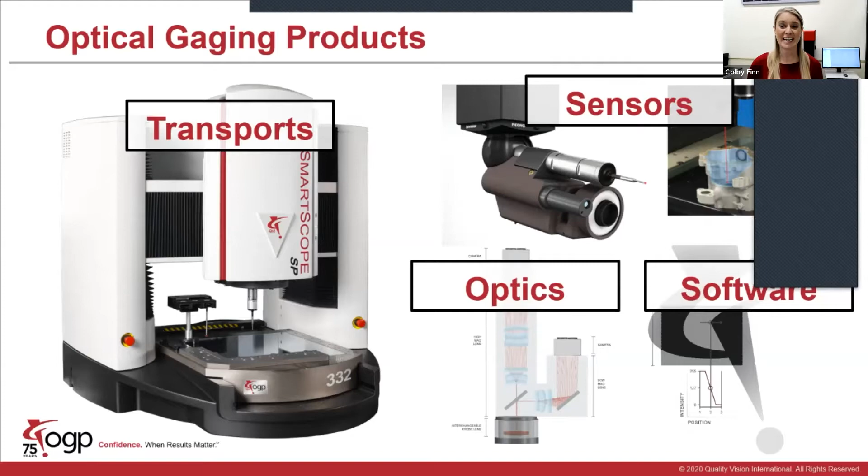So we are an international company, but we are headquartered in Rochester, New York. And what's great about that is Rochester is the #1 region worldwide for optics and photonics research. So there's a lot of top universities and other companies investing in optical technology development. So in addition to our New York office, we have other offices in the United States, as well as Europe and Asia.

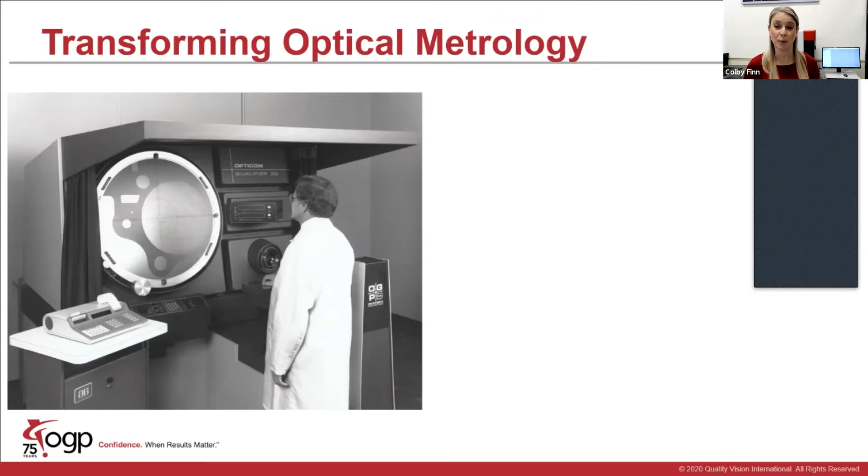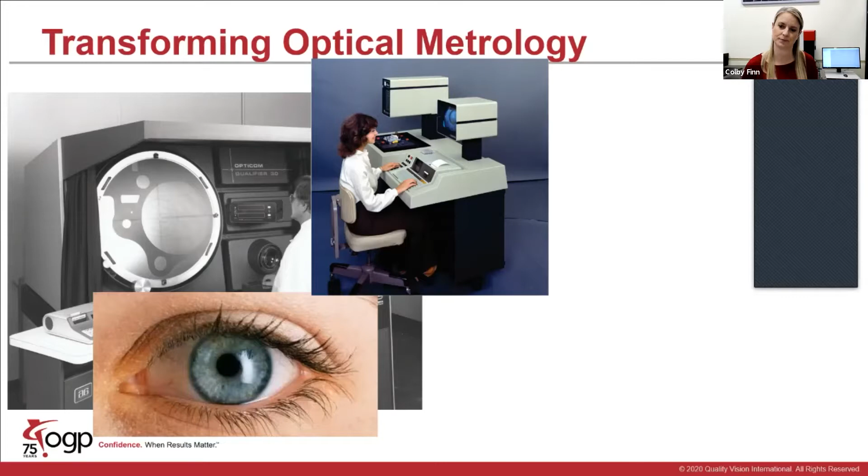So like I mentioned, we have been in the business of optical metrology for a little over 75 years. And we've been part of a major transformation in this industry. When we first started, all measurements were taken with the human eye, like you can see on the screen with an optical comparator. But ever since we introduced the first grayscale sub-pixel image processing for a video system in 1980, software became a key component of video measurement. And now today, it's hard to find any modern piece of measurement equipment that doesn't require software to take a measurement.

So why did this transformation occur? The obvious answer is software is more efficient than humans. You gotta pay people, they get tired, they complain, they make mistakes. But people are actually really good at some things related to optical measurement, such as automatically recognizing parts, detecting dirt, whether it's from your part or not from your part. And it's taken many, many years to get image processing software to the level where it can mimic human ability in video measurement, but also not require a lot of training. So today we're going to talk about how software technology continues to push optical metrology forward, both related to capability and ease of use.

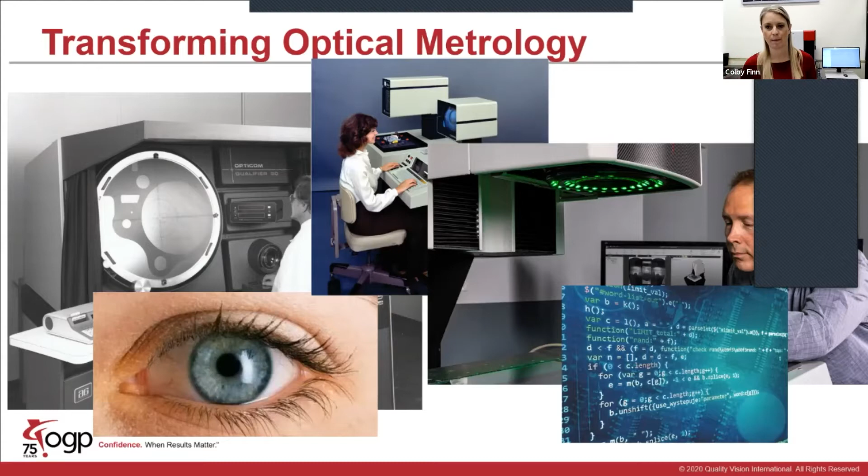So we organized our software tips based on the reasons people choose non-contact measurement technologies, say over traditional technologies like tactile CMM. And there's 3 reasons. The first is they're faster. You can get many measurement points and many dimensions in one shot with optical technologies. Second, they're better, meaning for some applications, you get more accuracy and higher resolution. This is specifically true for small parts with small features or delicate parts that you don't really want to touch.

And lastly, they're easy to use. So when you're programming a measurement system, teaching it what you want to measure, when it's an optical system, you see a live image of your part. So it makes it very easy to interact and get immediate feedback on what you're measuring.

So today we're going to talk about software tips for video measurement and 3D scanning separately. So both technologies have the same goal to measure dimensions on your part, but there's different strategies and best practices for each. Video measurement, you're usually measuring feature by feature or getting coordinates, where with 3D scanning, you're measuring and grabbing data on your entire part at once.

So Jim is going to show you software tips for video measurement using OGP's Zone 3 metrology software package. Zone 3 is the software that acquires and analyzes data from OGP's 3D multi-sensor systems. And I'm going to show you 3D scanning tips using Cotem's Evolve suite. So Cotem is a sister company of OGP. We're both divisions of QVI.

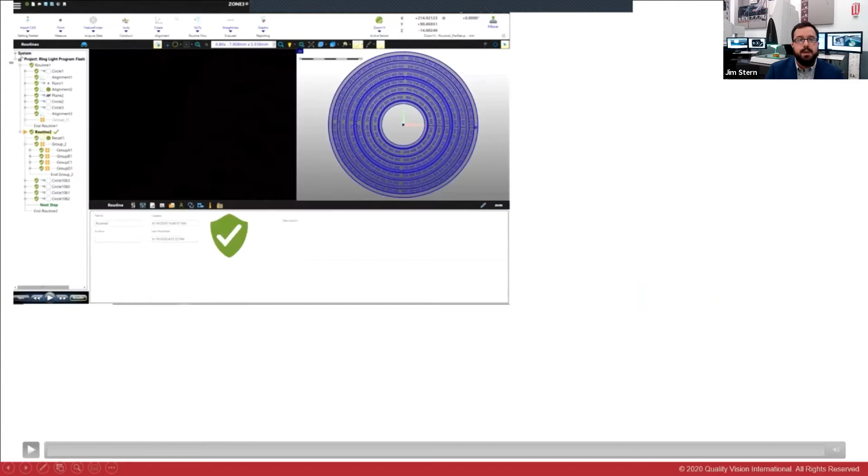So what you're going to see here in the video is a traditional zoom system with a smaller field of view. So we're going to be measuring a multitude of diameters on this part. So this traditional field of view system has a smaller field of view to start, but also has an optical zoom system to be able to increase accuracy and your optical magnification on the features that you want to measure.

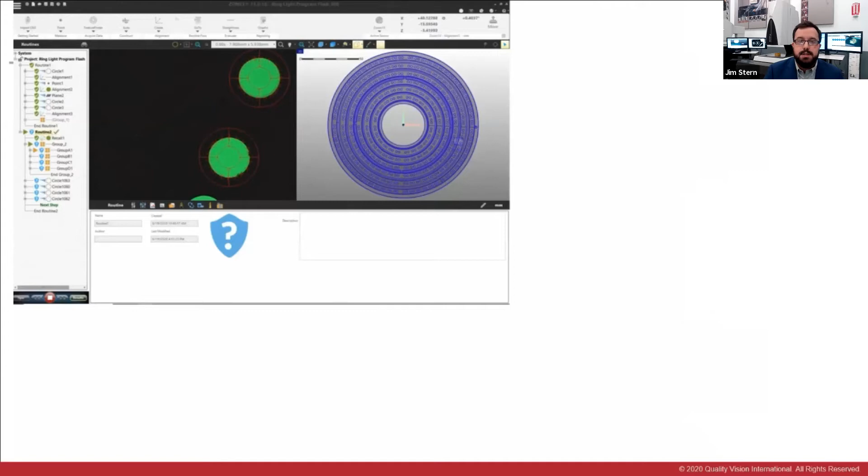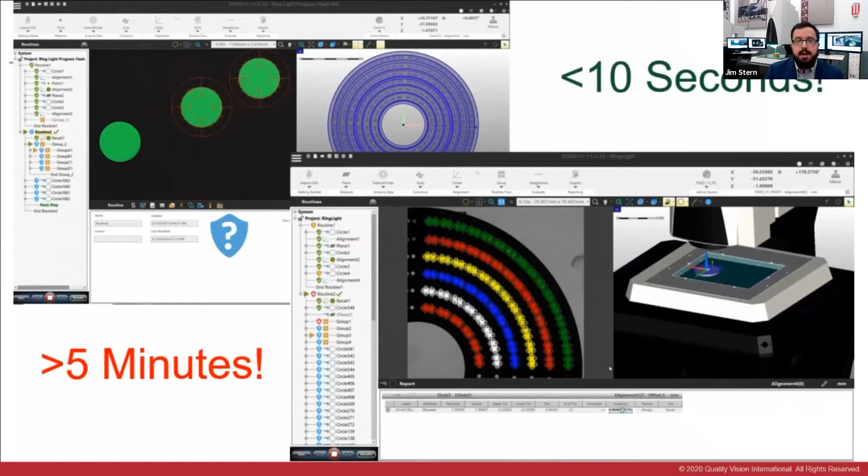So maybe this is not the system or the field of view that you might want to use when you're doing repetitive dimensional checks like these diameters going around this part, because it takes over 5 minutes. Now, let's do this same part on the Fusion system here, where you're going to see a large field of view and be able to see all the measurements at once. Now, while using software, we're able to measure all these diameters in a single field of view all at once, now reducing our inspection time to 10 seconds.

Another benefit of large field of view is that it allows you to recognize and align parts automatically. This is possible in Zone 3 at any field of view and on other systems like the traditional one we showed.

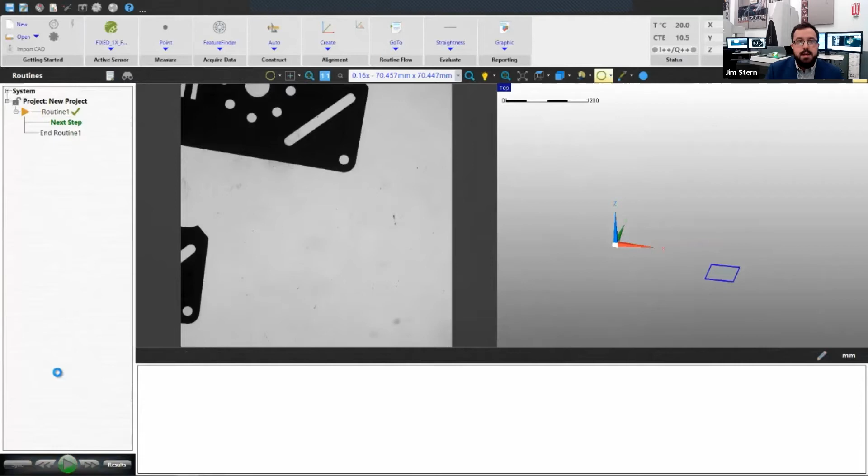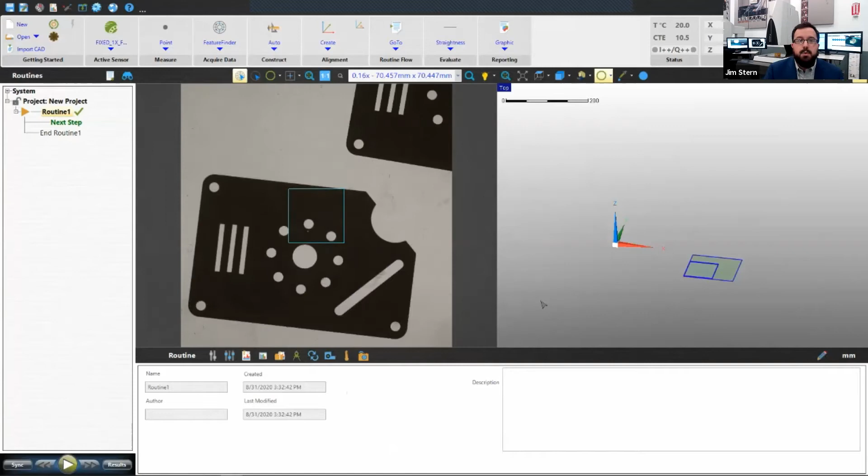But it is more efficient when you have a large field of view to see the entire part that fits inside that. So right here, we have parts set down on the stage, no specific orientation or fixturing, and then we're going to search in a specific area to be able to automatically recognize the part and then inspect all the dimensions that we need to in seconds, showing you a visual representation of what part passed and what part failed, so an operator can easily grab off the stage which ones they might need to reject or which ones they're going to keep.

All right. Now, with having large field of view systems, one thing you got to be aware of is some of the caveats that can go with that. If you're going to take advantage of these entire field of view systems that they have to offer, you need a very high quality lens design combined with advanced software compensations to get the accurate measurements that you're looking for.

We're not going to go deep into the optical lens design theory, but there are two things that are extremely important for video measurement, especially with large field of view systems. Getting the same results anywhere in the field of view, which equates to your distortion across that field of view, and getting the same results even when you aren't at the perfect focus of the system, which represents your telecentricity.

Here is a visual example of a system with poor optical performance for video measurement. As you can see, near one side of the field of view, you see the right wall of a straight down bore. Near the other, you see the side of the left wall of the bore. This is evidence of major optical errors.

Now, this is a gross example, but the tricky thing is an image can look perfectly fine to the human eye, but have huge errors across the field of view and the depth of focus, or the range the image looks in focus. We aren't talking microns, but hundreds of microns. Published accuracy specifications don't typically apply across the whole field of view. So you can't just assume your field of view is good by what you see on a technical data sheet.

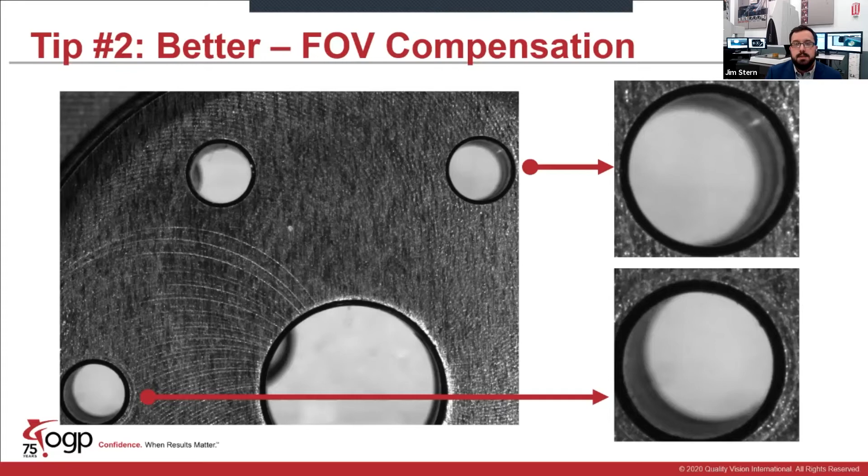At OGP, we've learned you need to have lenses designed specifically for your video measurement and software that understands the characteristics of your exact lens to get an accurate optical performance. Our large field of view systems go through rigorous alignments, compensations, and testing in the factory to ensure they will meet your customer and your specific subpixel accuracy expectations. And what you get is the images that you see on screen now, all right?

Our recommendation is to go with an experienced video measurement system vendor you can trust or get educated on tests you need to perform to confirm your video system is optically accurate. I would also recommend a real-world test of your application on the system you're probably thinking of choosing to measure your parts or your applications in the real-world environment.

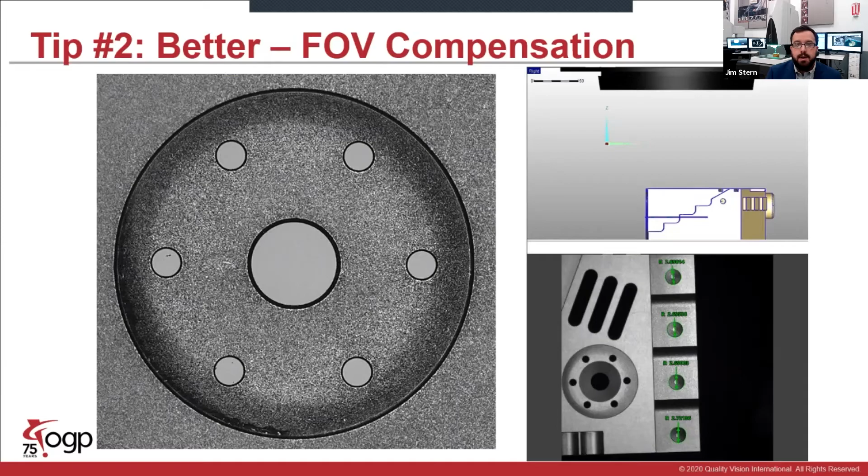Now, with this, you also get to use your full field of view when you're compensating for the distortion correctly with the software or any errors that might be involved. Because you have a large field of view, you want to be able to use the whole optics or what you see on screen. So as you move around the stage, you want the same results inside the accuracy specification for that field of view.

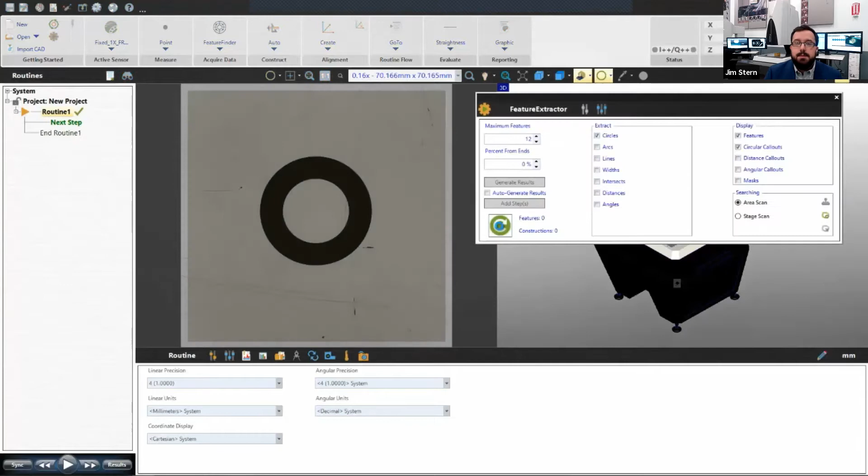So now let's get into maybe some easy video measurements, all right? So one thing you can utilize to make video measurements easier is CAD models, all right? Everybody has CAD models these days, but CAD models really simplify measuring with video. There is a misconception that programming from 3D CAD with video is difficult.

Since your CAD model is 3D, hold on, let me turn the light back on.

Gotta save energy. Since your CAD model is 3D and you're only seeing a 2D video image on screen. But this is definitely not the case, and I will show you a couple examples of this.

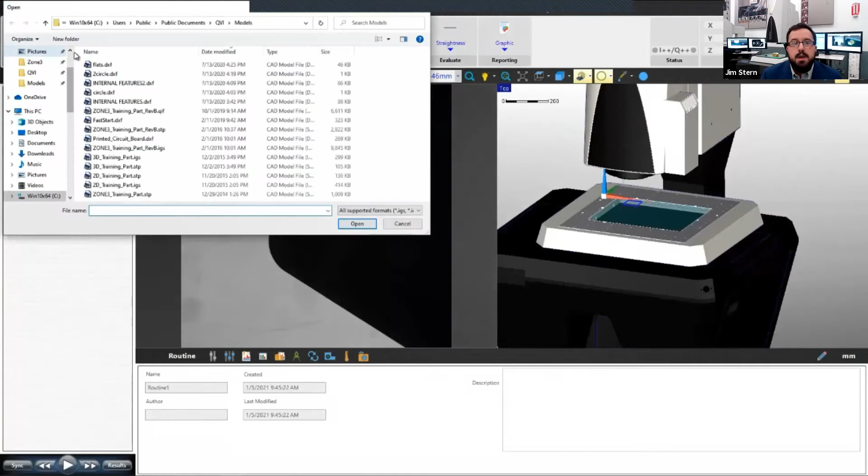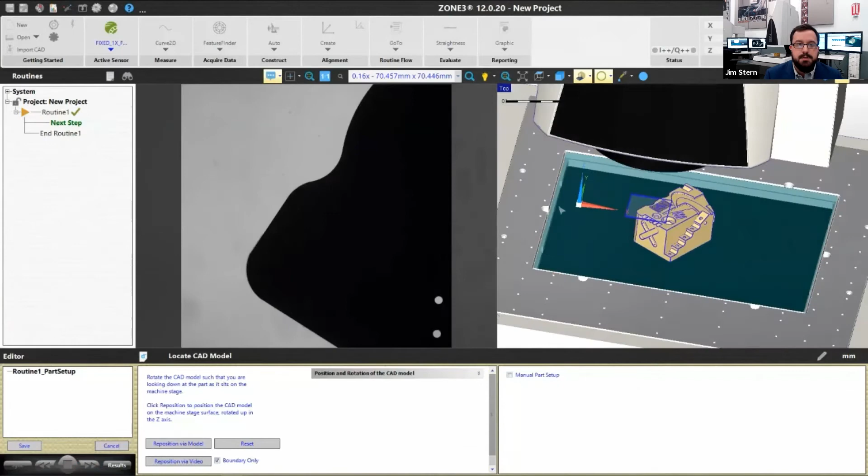All right. So what you're seeing here is a 3D CAD model loaded into our Zone 3 software. It comes in CAD coordinates, but it's not really where it is sitting on the stage. So what we can use is the large field of view to automatically figure out where the part is on the stage using our reposition via video option in Zone 3. Now, once it figures it out, it places it on the stage in the real world where it is, all right?

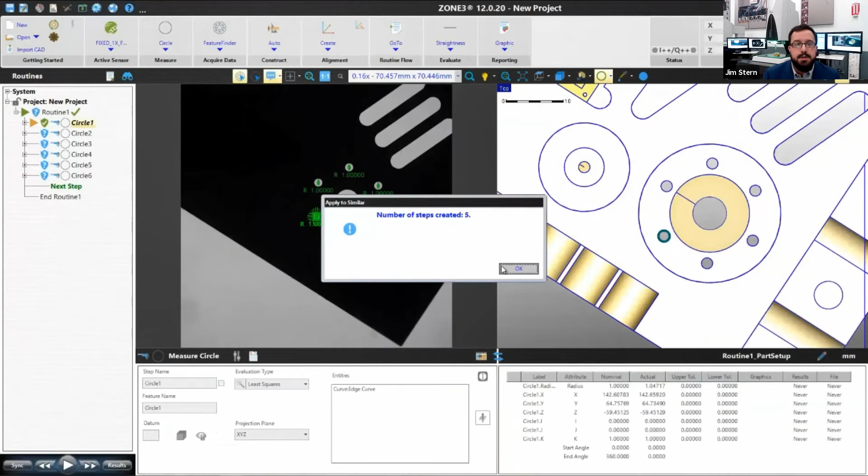So now I can quickly start measuring features on that CAD model using automatic path generation using our edge detection feature finder. Once that's done, I can then use the CAD model to automatically search for similar features and automatically program the extra 5 circles that you see.

We can optimize that to then utilize the field of view to automatically measure that in one single spot on the field of view, trusting that we get the same results because we're compensating for any kind of errors across that whole field of view.

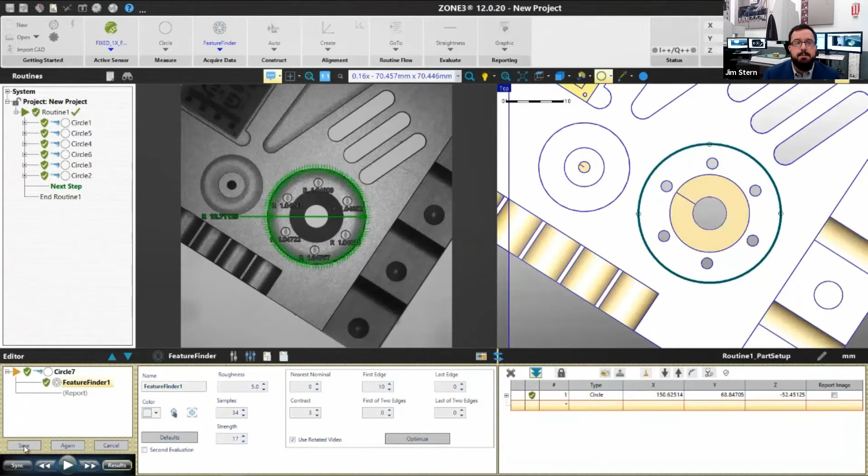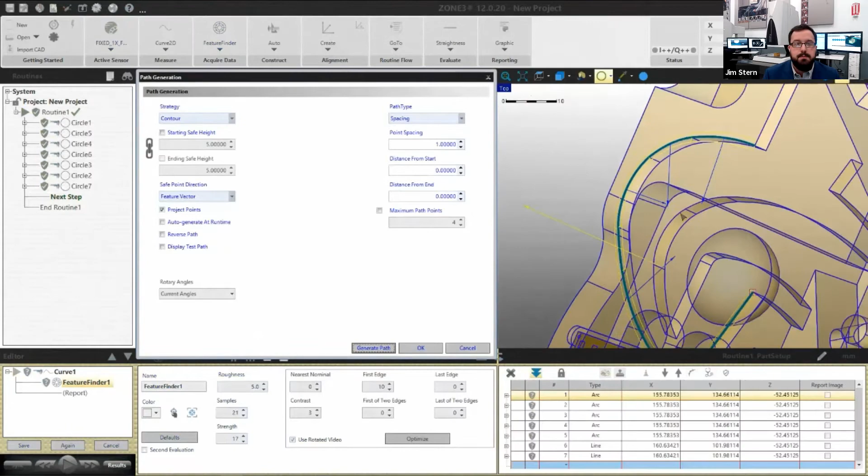Another misconception is being able to measure features that might not be able to be measured using backlight, as well as complex curves or geometries that you'll see here. I'll select multiple curves into one finder, and then use the system to automatically generate a path to measure these features with our feature finder tool all at once. And then we'll go automatically to where it is and measure this automatically with our feature finder tool, breaking up into lines and arcs based on that complex curve.

All right. Those were some tips on how to get faster and better easier measurements with video sensors demonstrated by the OGP Zone 3 software. But now I'm going to send it back over to Colby to give some tips for 3D scanning using Evolve Smart Profile. All right, there you go, Colby.

Thank you. Great. Thanks, Jim. So like Jim said, I'm going to show faster, better, and easier tips for 3D scanning. Before I get started, I'm going to show you the machine I'm going to use for my demos. So let me stop the share for a second.

So this is an OGP ShapeGrabber AI 320. ShapeGrabber systems are automated laser scanners for fast 3D measurement. The system can take more than 1 million points a second. So the laser line scan head moves up and down behind this cover here, and your part automatically rotates on the rotary here for full 360 degree coverage.

So this system here can have up to a 190 by 300 millimeter cylindrical measuring range. And this is our most compact automated unit, but we do have larger systems that can scan parts longer than a meter. This system also has a tilt axis that actually tilts the scan head. It's motorized, it's automatic. And that way you can scan the top of your part without having to pick it up, flip it over, rescan it, and use software to stitch it together.

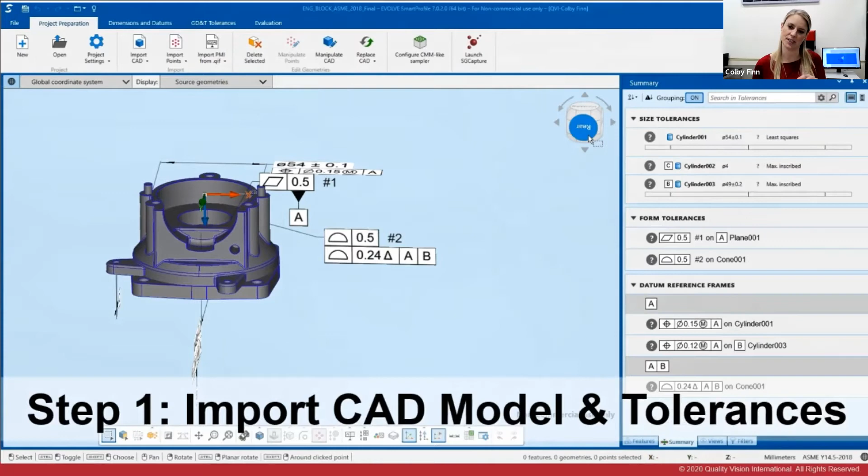So I'm going to show you a new software technology that allows you to overcome these issues and do fast GD&T with 3D scanner data. We're going to use Evolve Smart Profile and a CAD model to do very quick GD&T. Sorry. So the first step here is to import your CAD model and tolerances. And if your design engineer didn't embed the tolerances in the model, you can readily add them in Smart Profile.

Once you have everything in there, you're going to import your measured points. I'm going to use points from my ShapeGrabber system here, but Smart Profile can take points from any device, whether it's a CMM, laser scanner, CT scanner. So you'll see my points in a second. It's the green scan cloud.

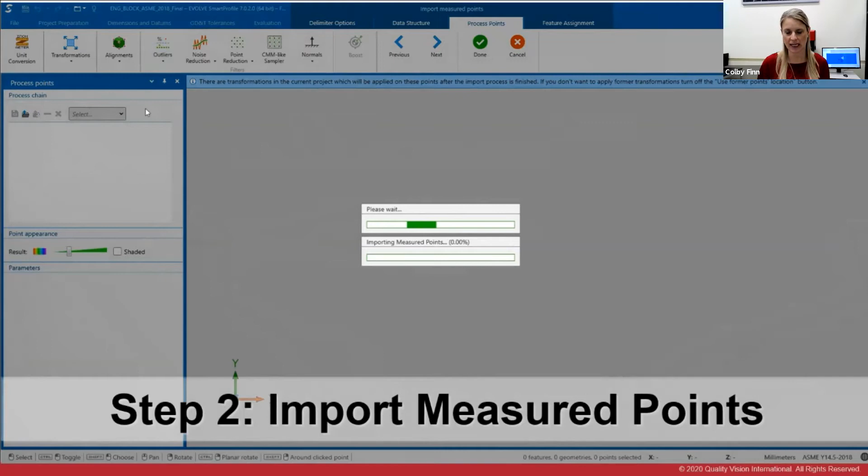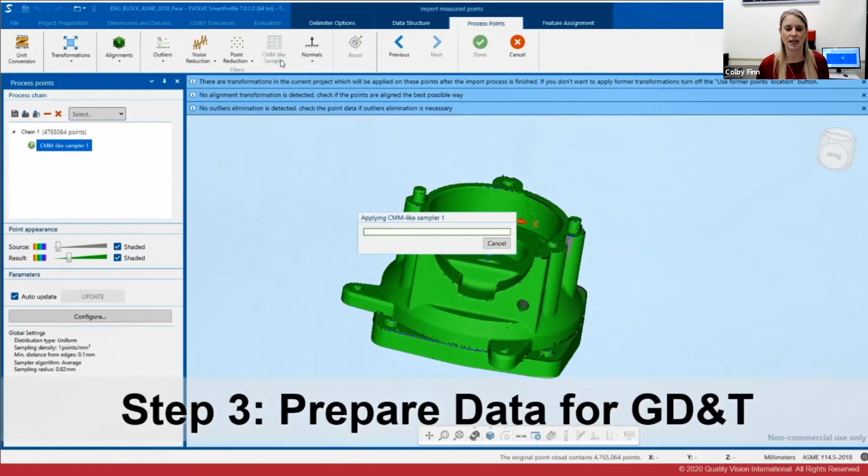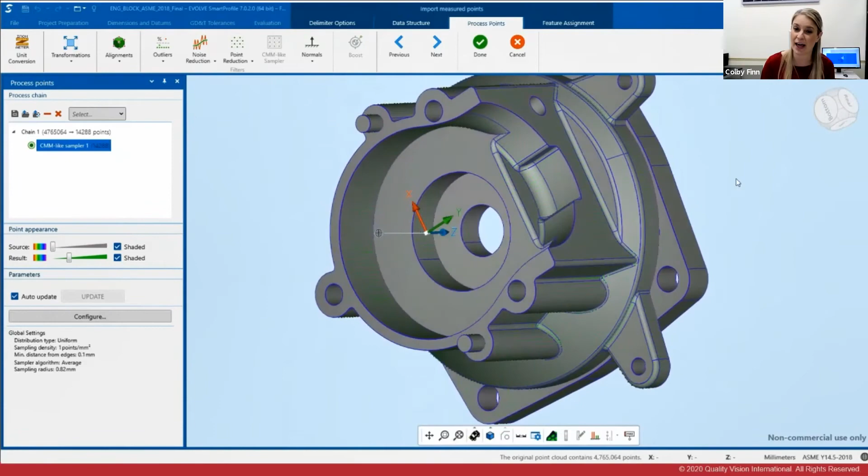So we call it the CMM-like sampler because the resultant point cloud we're going to get is going to look like a high density point cloud taken with a CMM. And similar to CMM data, all the points are going to be valid in X, Y, and Z, and therefore you're ready to do GD&T. I don't know if you can see it through the video, the tiny green points on the model are my points after the CMM-like sampler. So now we're ready for our fourth and final step, and that's to evaluate the GD&T results.

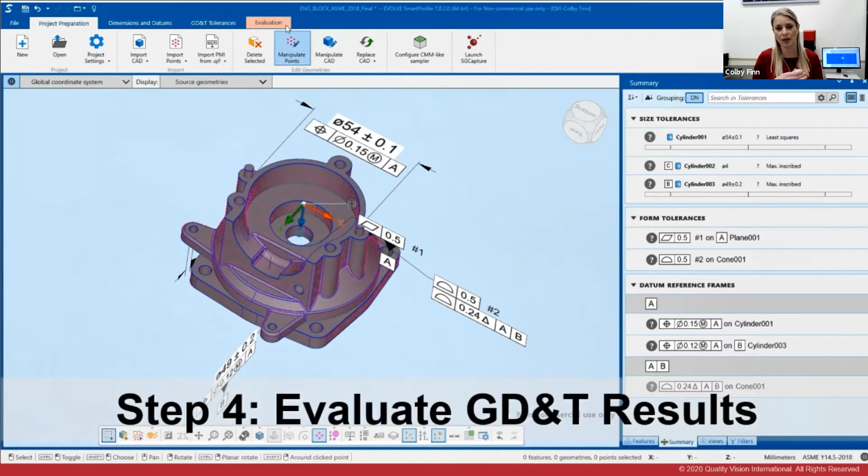So the software is going to fit the point cloud to the CAD model, run a bunch of optimizations to simulate hard gauging and give you GD&T results. So you will see here that everything passes.

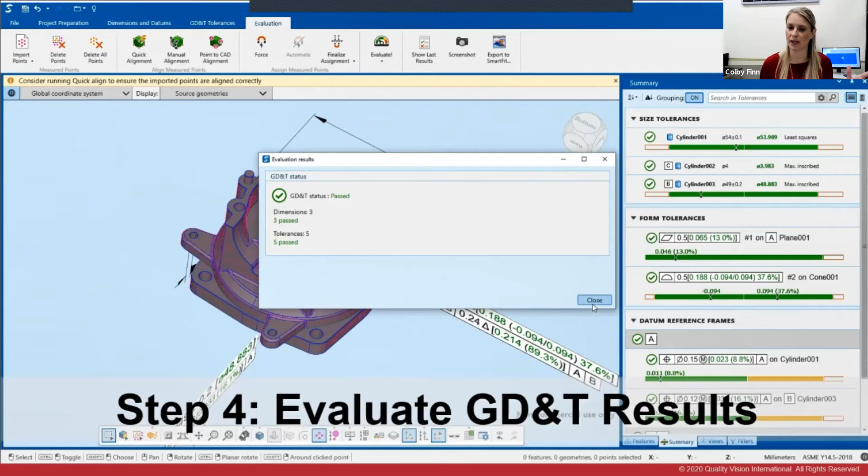And what I was showing you was a step-by-step of how to process 3D GD&T with Smart Profile, but all of the steps from data acquisition to reporting can be fully automated. So you don't need someone here clicking the buttons. You can get a fully automated workflow.

So this demo was how to get fast GD&T with a 3D scanner. And now we're going to move on to how to get better data from a 3D scanner, so more accurate results from 3D scanning. So I'm going to show you a software technique that allows you to get better measurement results without investing more money in hardware. So we're going to show a new software compensation method called Boost.

And what Boost does is lets you take the accuracy of a reference machine and map it onto the data from either a cheaper or a faster technology that's not quite as accurate as the reference device. So I'm going to show you an example of Boost for 3D scanning.

And Boost is part and machine specific, which means you have to create this compensation for every part and machine combination you want to give this accuracy boost to. But luckily, the software does most of the work for you, and I will show you the 5 easy steps to both create the compensation and measure your parts in production.

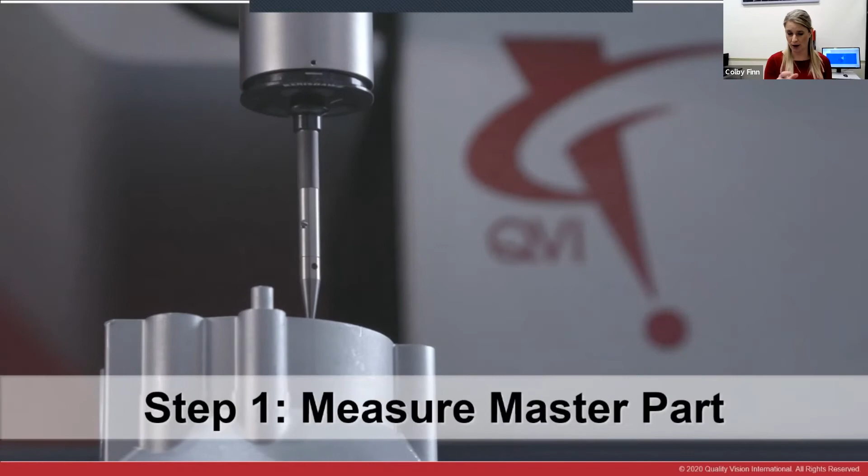So the first thing we're going to do here is select a master part from our production run and measure it on both our high accuracy device, in this case a CMM, and our fast production technology, in this case our 3D scanner.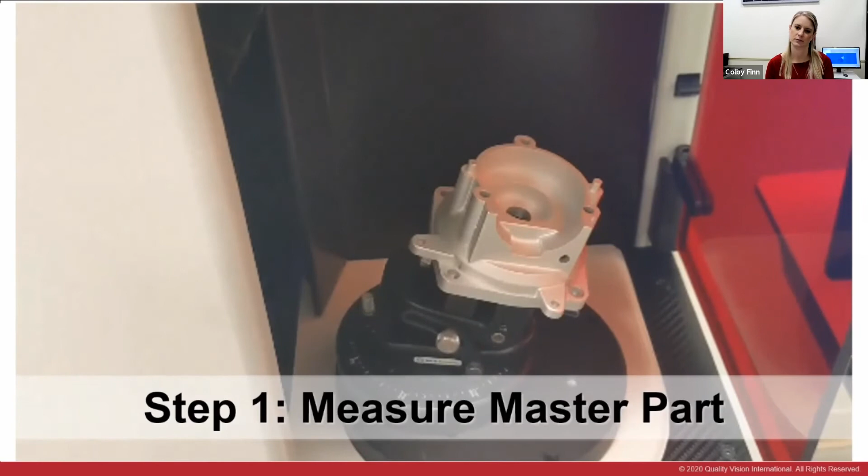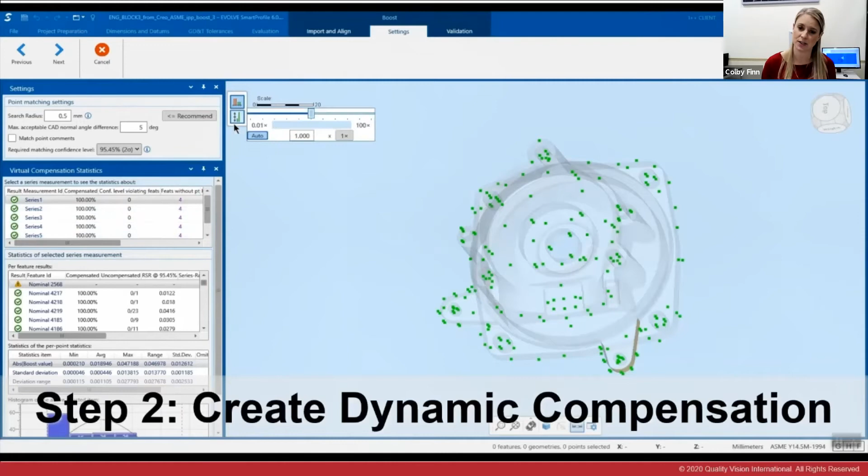Once we have the point clouds from both devices, we're going to load them into Smart Profile, and it's going to automatically create that dynamic compensation. Again, this is going to map the accuracy of the reference device onto the data of your high-speed device. So you'll see on the screen, the little whiskers represent the point-based compensation the software is doing. So once you have this map created, you're done with your reference CMM, and you're ready to measure production parts.

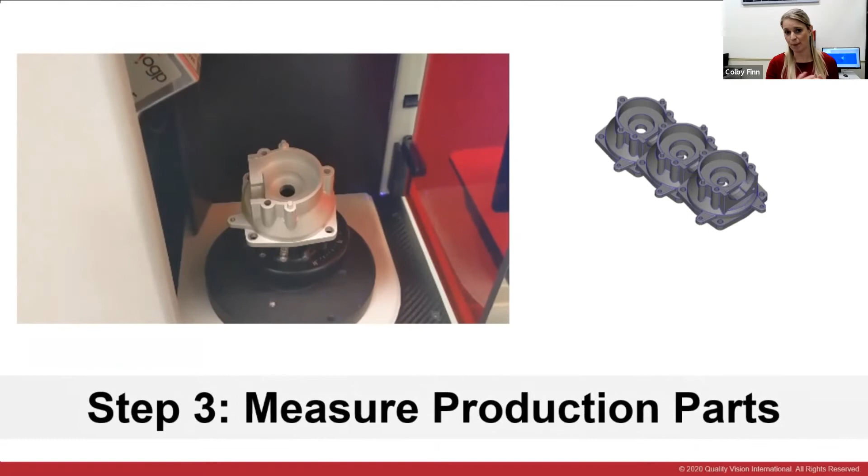So step 3 here, we're actually measuring our parts with our very fast technology. And now step 4 is to apply that boost compensation. So in Smart Profile, we're going to click the boost button, and it's going to make those production points more accurate.

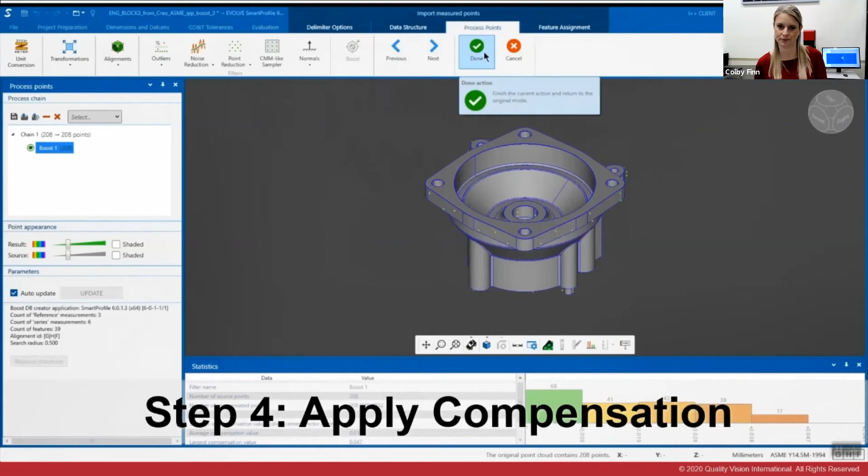So now that we've done that, the last and final step is to evaluate the GD&T of the compensated points that are more accurate. And now everything passes. So similar to our last demo, all of these steps can be automated, and I'm going to show you a quick video of what that looks like and what our typical production workflow is like.

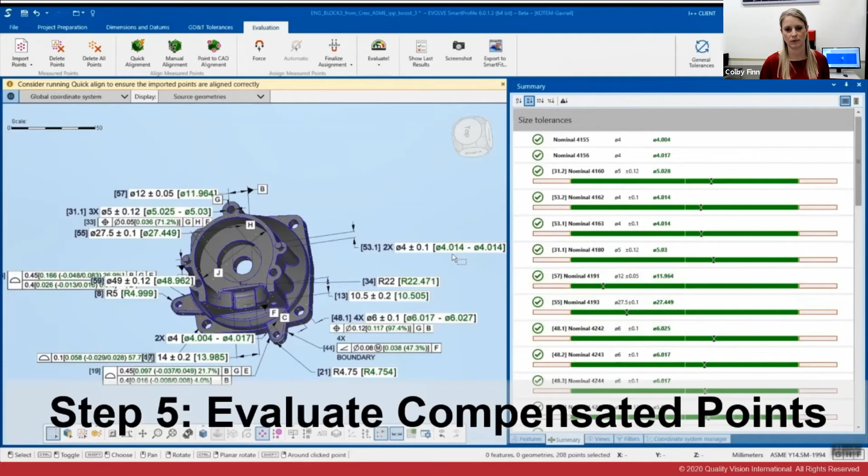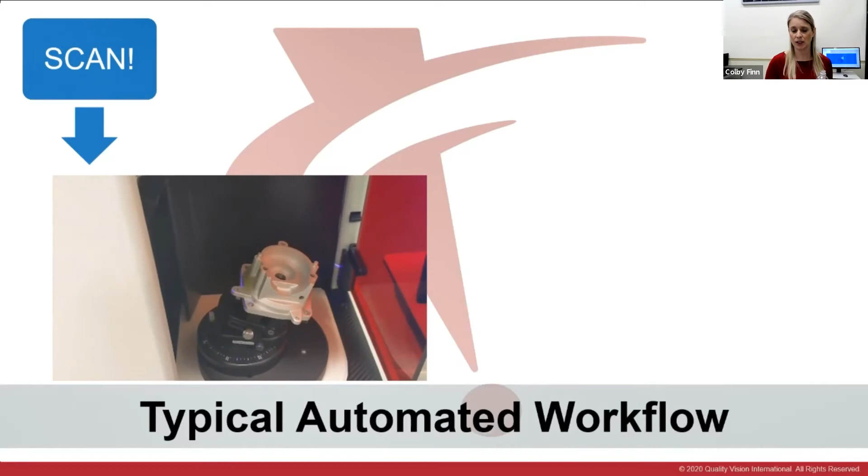So here is your typical automated workflow. The operator pushes scan and the machine starts acquiring data. As soon as it's done, the points are going to automatically go into Smart Profile, and Smart Profile is going to automatically start evaluating them and produce a report.

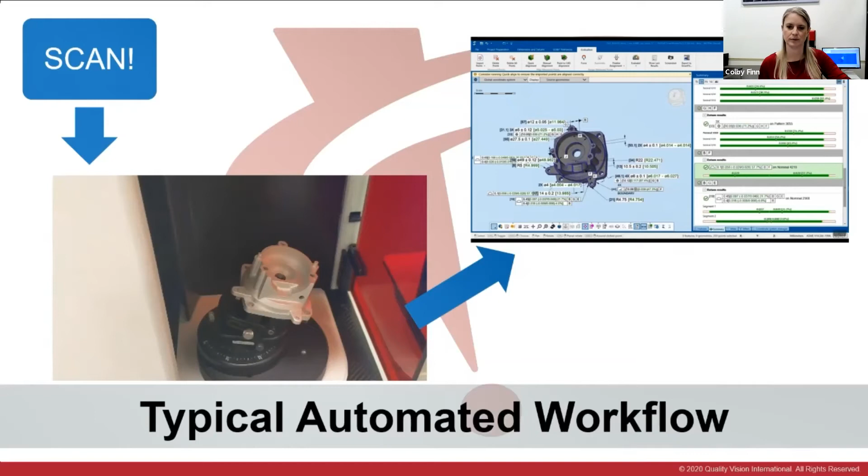So this was a way to get better data using software for 3D scanning. Again, you can use software, so you don't have to invest as much money in hardware. So our final tip for 3D scanning is about making measurement easier. And we're going to show you how to do easy 3D GD&T failure correction.

So GD&T can save a company a lot of money, but that's only if the entire manufacturing operation is applying it correctly. Meaning the design engineers entered the correct tolerances, the quality engineers evaluated them appropriately, and the manufacturing engineers know how to adjust their processes to get parts to pass. And we're going to focus on that last aspect, the connection between quality and manufacturing.

So say your GD&T fails. What do you do to get future parts to pass? Machinists are used to working in their machining coordinate systems with their fixtures and their control points. They don't want to adjust their process based on our profile tolerances and our GD&T datum structures.

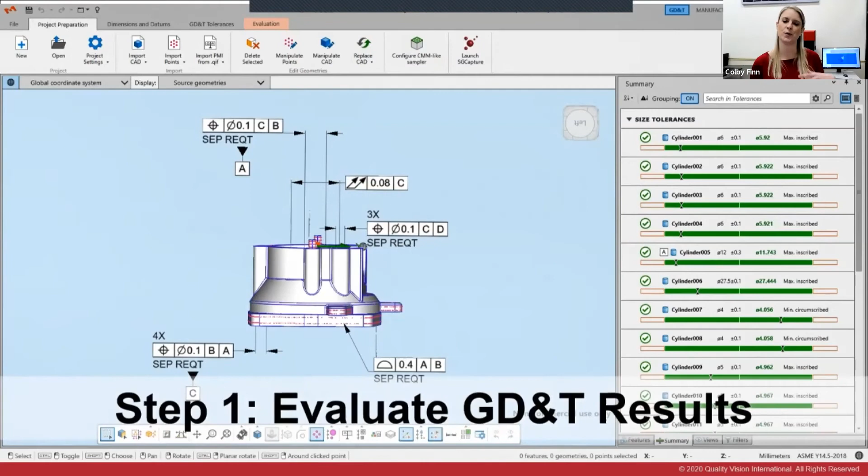So I'm going to show you an easy software tool that takes GD&T results and translates them into machining corrections to get future parts to pass. So this is a new simulation and optimization tool that's part of Evolve, in the product Evolve Manufacturing. So we're actually going to start out where we left off with the other two demos, where step 1 is to evaluate our measurement points for GD&T.

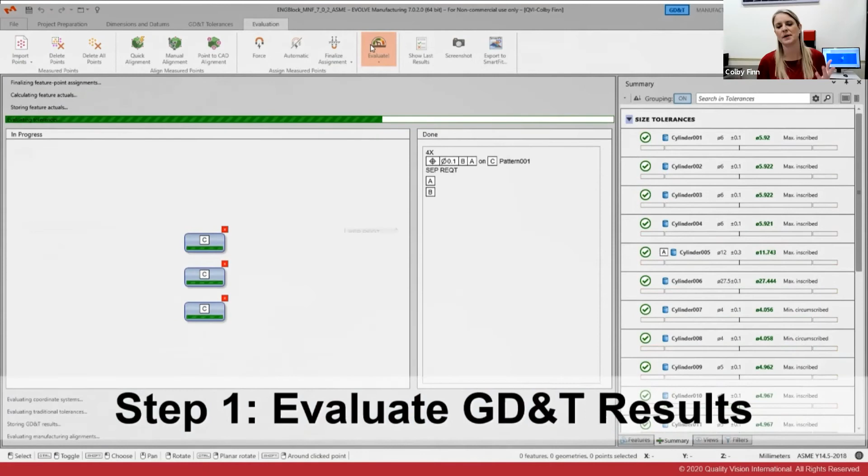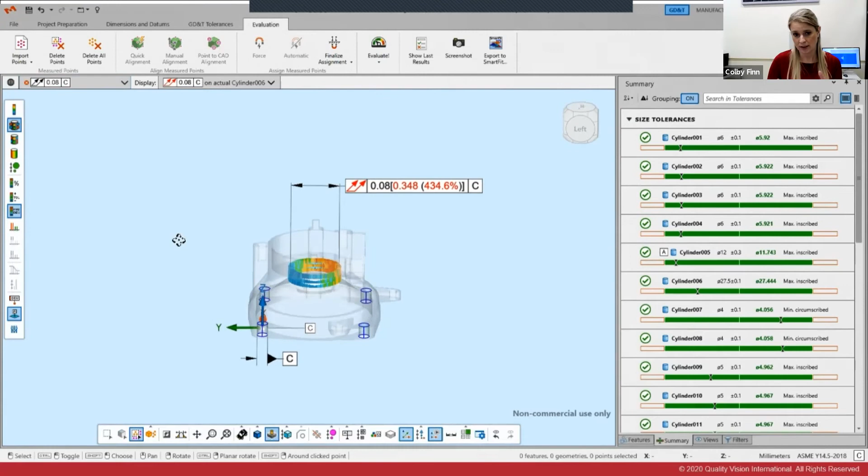But this time I'm going to have a bunch of failures. You're going to see a lot of the red on the screen. Red is bad, means things are failing. We're going to focus on this total runout tolerance of a cylinder relative to datum C right here. So if I click on that, I will see the points and see how it's constrained to the datum.

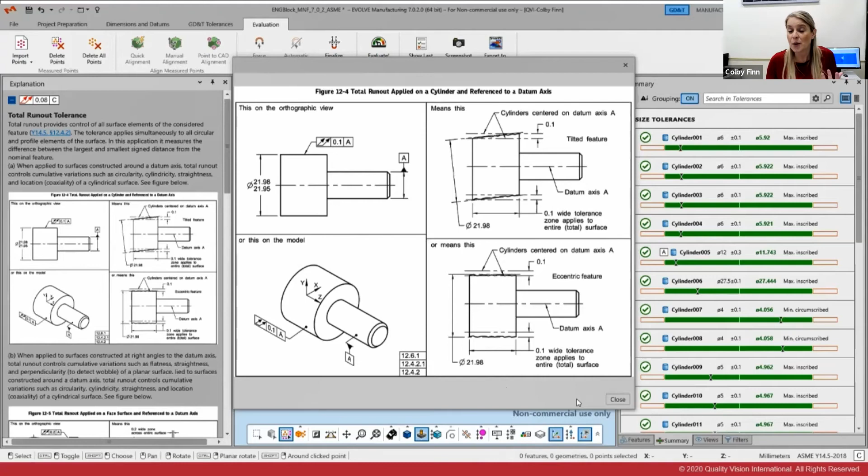And say I wasn't quite sure exactly what this call out meant, I could click on our explanatory system, and it's going to bring up the exact part of the GD&T standard where that call out came from. You can see the diagrams and everything. But even if I'm educated on total runout, I still don't know how to fix this failure. Was my cylinder manufactured wrong, or was my datum machined in the wrong position? So that's the problem our software is going to solve for us.

In order to do that, the software needs to know the manufacturing details. So we're either going to import from CAM or enter the manufacturing coordinate systems and tell the software how the features are grouped together by machining operation, meaning which features were machined together. With this information, the software can run what-if simulations. What if I shift operation 1 over a little bit? Would that make my GD&T results pass?

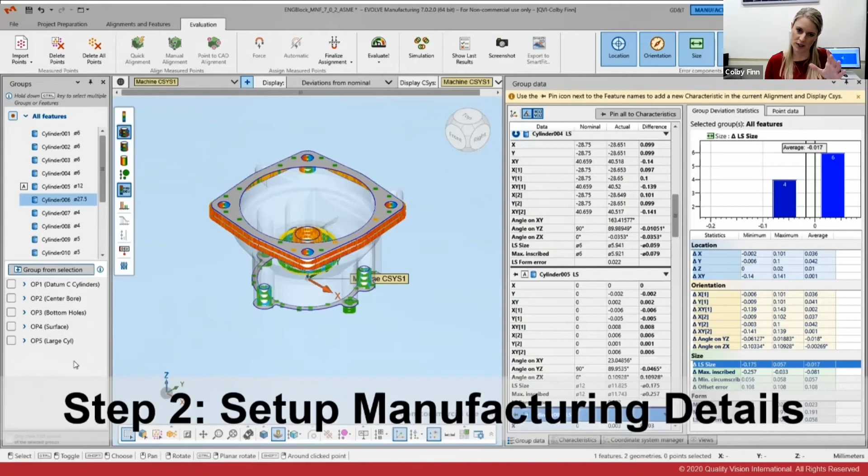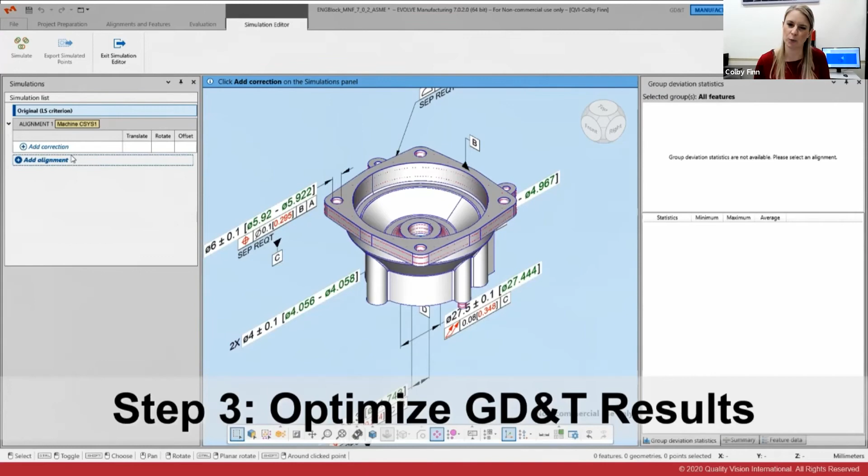So now that we know which features are machined together, we're going to go into our simulation wizard here. And in this wizard, I'm going to tell the software what manufacturing operations I want to allow to be adjusted. And I'm going to select operation 1, which made that datum C that could be problematic. Then I'm going to check optimize and have the software run the simulation.

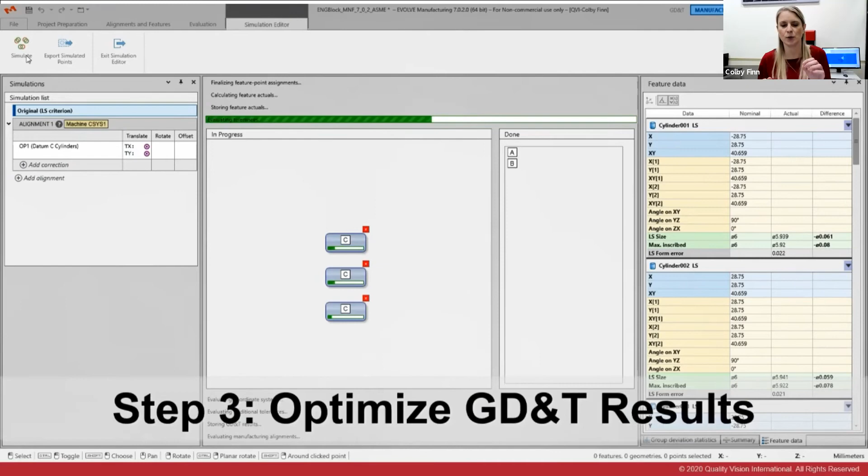So what it's going to do is calculate the best adjustment to that manufacturing operation to get the GD&T to pass. So when this is done, you'll see a recommended adjustment, and then you'll see the simulated results of what the GD&T would look like if manufacturing made that adjustment.

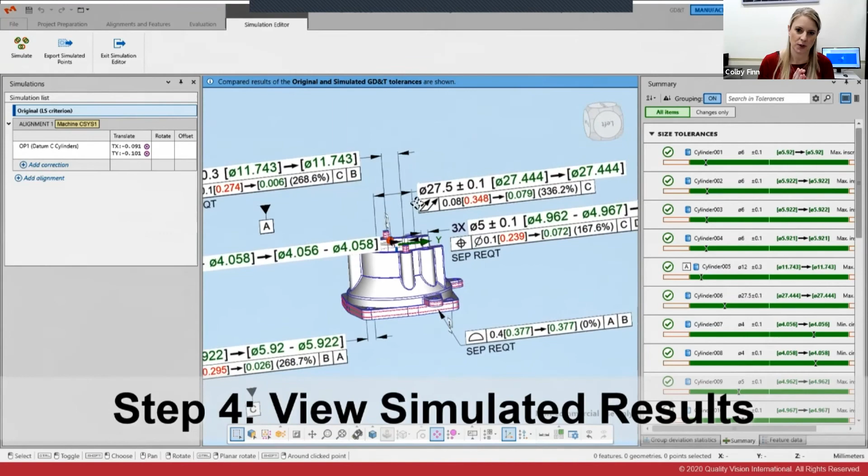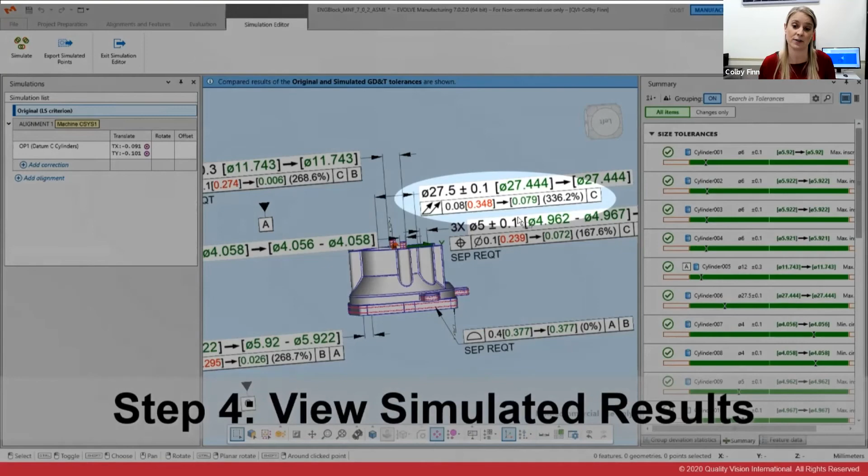So first, we'll look at the recommended adjustment. It calculated that we should shift operation 1, that datum C, over in X and Y by about 0.1 millimeters. And the simulation results are shown in the model window with the little arrow showing before and after. If we were to apply that manufacturing adjustment, the results after the arrow are simulated results, and that total runout tolerance would pass. And if you look, actually everything's passing now. So that datum C was my whole manufacturing problem.

So with this information, the quality engineer is now armed to go talk to manufacturing and know how to fix parts going forward so future parts pass. So that demo showed how it's easy to communicate between quality and manufacturing with the Evolve suite. The whole goal of Evolve is to help a company implement GD&T across the entire enterprise.

So that's our final tip. And the key takeaway from our presentation today was that advanced software makes optical measurement faster, better, and easier. Therefore, you should take the time to learn and implement new software technologies to help you better measure dimensions on your part.